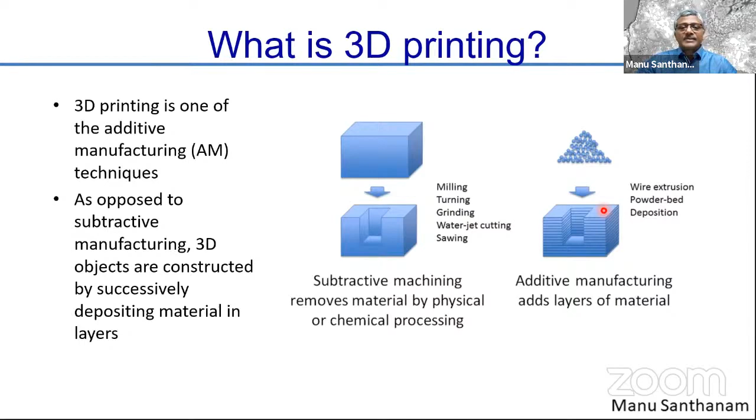Now, as far as construction is concerned, there are two major options for 3D printing. One is extrusion-based 3D printing, which is going to be the bulk of what I'm talking about here. Extrusion-based just implies that you're pushing something through a nozzle, and this is getting deposited layer by layer. So that's basically extrusion-based 3D printing.

The other option is obviously to have a robot which is sitting in one of the corners or perhaps in the center of the building and simply depositing material all around it. That's, as you can imagine, a lot more expensive as compared to this frame-based system, which is easier to construct and possibly easier to scale up in terms of an industrial scale application.

The other 3D printing operation that is conceivable in construction is binder jetting. Here, you're essentially creating the object by depositing the ink on a bed of the material that needs to be printed. For example, on a mixture of cement and sand together, you just deposit water in the shape that you want the layer to take. And essentially you keep on depositing more and more material like this.

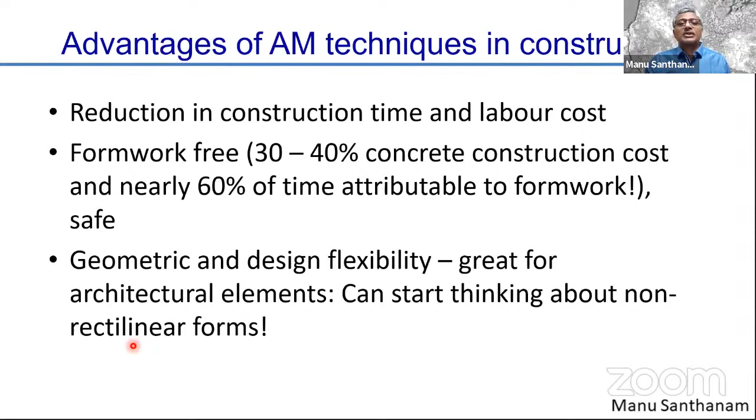Now, of course, there are limitations as to what we can do with concrete, but nevertheless, you can realize something which we cannot do with conventional techniques. So again, let me put this in context at the beginning itself. If we are planning to create more and more boxes like we are used to doing with conventional construction, then 3D printing is not the right option. If we really want to use the benefits of 3D printing, we need to create these forms which cannot be conceived by normal construction.

There are several companies around the world which have executed projects in 3D printing. You have companies based in Netherlands, Italy, Slovenia, USA, and one of the most popular companies is this Witteveen & Bros in Netherlands, and they have created some very amazing structures in Netherlands. And of course, as I said in the beginning, we have our own company, Tvasta, which is from IITM alumni, and they have really done us proud by actually being the first Indian manufacturer of 3D printers for concrete.

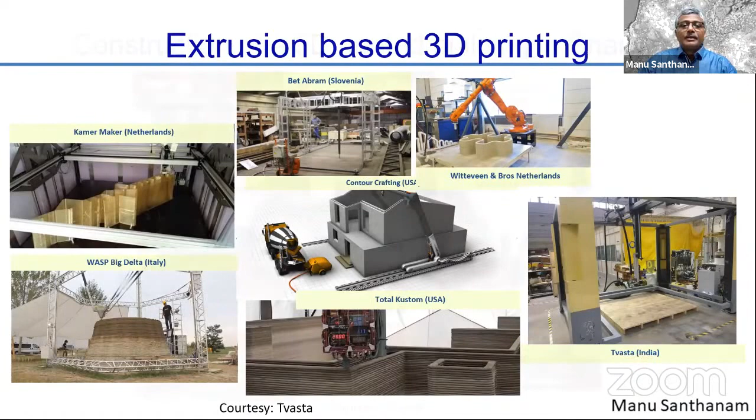So this is just a concept that I'm trying to explain here, what you can do with 3D printing. So this is a factory-like setting in which these construction elements are being created. You can see these structural elements being printed by a similar type of gantry type printer. So it is depositing the material layer by layer. Once this element has been fully deposited, you store it or stack it in the factory.

Most of you must be aware that for concrete, in order to gain strength and in order to ensure that the cement properly reacts with the water, we need to cure it for a substantial period of time. Curing simply means keeping the concrete in a moist environment. And that is what you need to do in the factory to ensure that the element gains sufficient strength. Once it's gained strength, you can then bring it to site and assemble it. So this is possibly the way in which we can speed up construction projects significantly.

Now, one question that must pop in your mind at this stage is, why is it different from precast? In precast also, we do the same thing. We make the construction elements at the factory, and then we assemble that at site. The difference here is that you don't need formwork. In a precast factory, you need a substantial amount of formwork, and a lot of the productivity of the precast factory depends on how fast you can actually reuse the formwork. When can you go to the next stage and so on and so forth.

Here, you don't really have that problem. You can continuously print as many as you want, as much as your factory space will allow, and then ensure that you can actually transport all these elements quite quickly to the job site and get them assembled there.

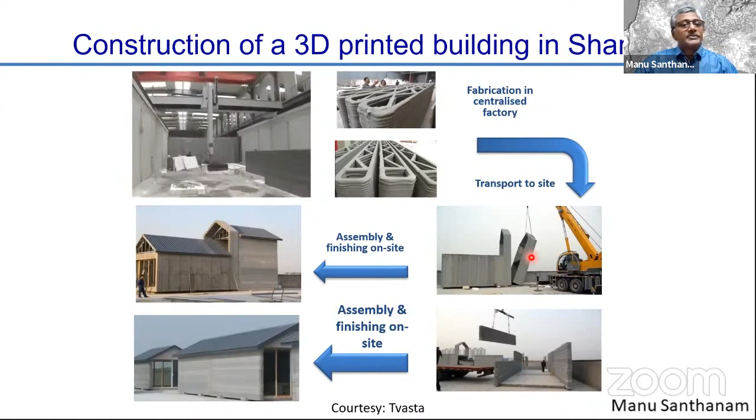Now, several projects have actually been executed, mostly in terms of pilot projects or demonstration structures across the world as far as 3D printing is concerned. So this is a very interesting example of a 3D printed house in Moscow done by Apis Cor. And you can see here the machine, which is basically a robotic arm, which is depositing concrete all around it

and creating this nice circular type of shape, which is not conceivable by typical construction, because then you have to spend a lot of money on shaping the formwork correctly and so on. And such formwork which you create for such special shapes may not be usable again, right? So that's again a waste of money and time in creating this kind of formwork.

These are projects executed by Winsun Global in China, and China is a place where the industry has really pumped in a lot of money and are taking the lead in actually defining the kind of projects that 3D printing should be actually used for.

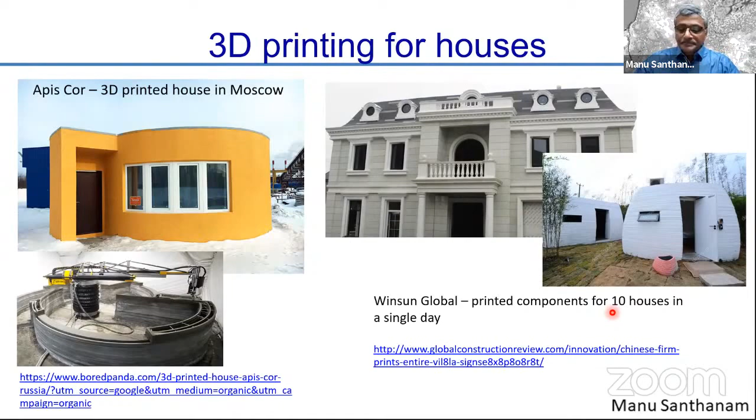So here what they've done is these smaller houses, they printed components for 10 houses in a single day. So that shows the extent of speeding up or scaling up that you can actually do, because you have now the potential for creating more and more of these units. And all you need to do is ensure that there's sufficient amount of transportation available to carry them to the site and place them.

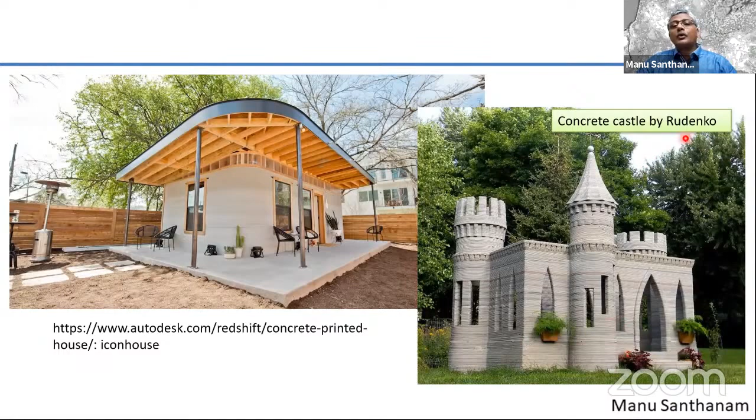This is a project executed by the company called Icon. That's a very nice example of how aesthetically pleasing your structure can be. And of course, on the right, you have a structure that is possibly not important, but it just was made to show the potential for 3D printing for creating unique architectural shapes. So there was a mini castle created by Rudenko, who's one of the pioneers as far as 3D printing is concerned.

But of course, this is mostly on a pilot scale. Commercial scale projects, as was earlier pointed out by Jayapriya, have been executed in Netherlands and the US. Most of the others are primarily your demonstration or pilot scale projects.

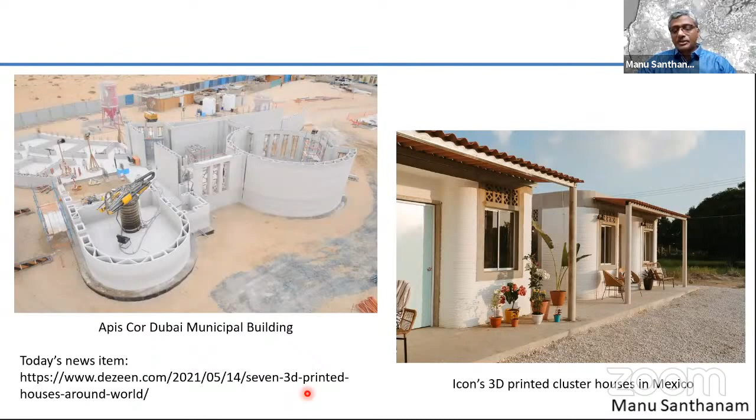One of the uses of 3D printing to create army barracks by the US Army Corps of Engineers was executed for the purpose of actually creating these structures in difficult terrains where you could not get regular construction equipment and manpower to do the construction. And so they were executing this from the perspective of looking at it as army construction.

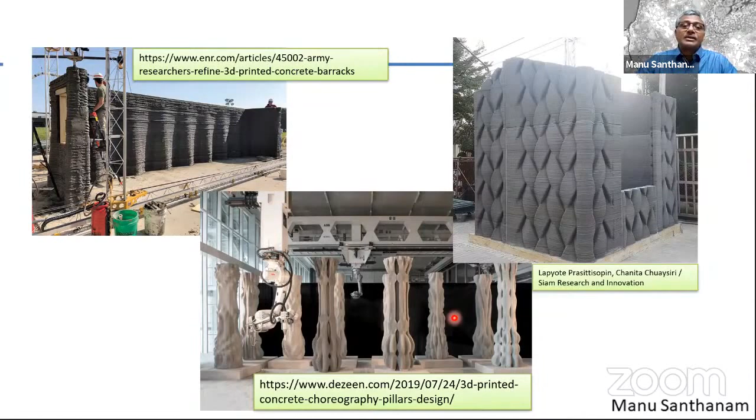And again, you can see the intricacy that can be created with 3D printed designs. This is actually a small security shed that is created by Siam Research and Innovation in Thailand. These are very intricately crafted columns that you can see. These are basically research that is going on at, sorry, not EPFL, ETH in Switzerland, which is a university doing extensive work on architectural aspects of 3D printing.

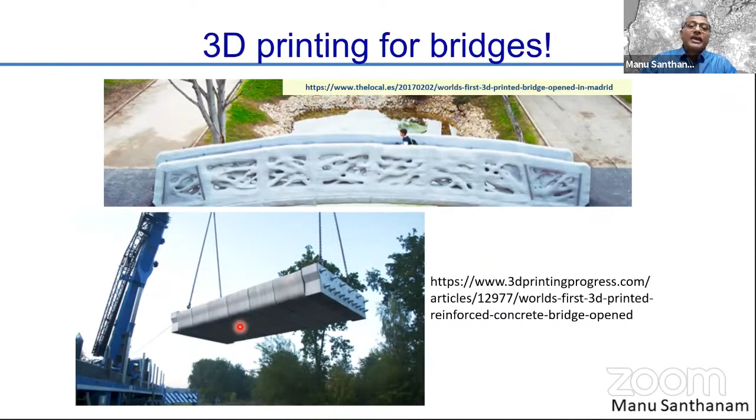Again, 3D printing has also been demonstrated to be used for bridges. This is a pedestrian bridge built in Madrid. And this is actually a post-tensioned segmental bridge that was executed in Netherlands. So there are opportunities for using 3D printing for several different types of elements. However, our focus here is to look at housing.

And this is something that most of you probably are aware of, that our urban population in India is going to be close to 1 billion in 2050. And going by the current estimates, we seem to be heading towards a need of 100 million houses by 2030. We don't have that much time, only 9 years. You might have heard of the schemes that have been specifically created to ensure that we serve the needs of so many different sections of the population by building more and more houses, which is the Pradhan Mantri Awas Yojana.

And then this has given rise to a new event that was launched in 2019 called the Global Housing Technology Challenge, or GHTC, which brought together many different potential technologies that could actually help in rapid construction of mass housing in India. Now, it turns out that for the future, one has to start looking towards technologies that will increase the productivity and not really suffer from the same problems that conventional construction does. And this probably gives some sort of a leeway for 3D printing to be a possible solution for India's housing needs.

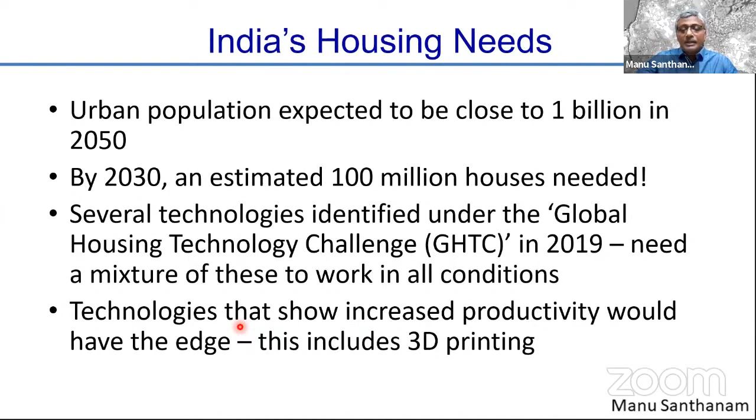However, you have to realize that once you go with 3D printing, there are further needs for scaling up, and really to take it up to the level that is needed for mass housing will take quite a bit of research and development. So why 3D printing of houses? As I said, individual customization can be done.

So when you build mass housing, very often we feel that people have created these boxes, right? You have the same box replicated hundreds of times. With 3D printing, you don't have to worry about that, because each of these units can now be customized to the needs of the client. Even though it is affordable housing, they can still customize it because the printing can be done in different shapes. You don't need to recreate the same shape each and every time.

You can create structurally efficient forms, because what we are creating here are walls which are mostly empty, which have ribs inside to give some lateral strengthening, but mostly these walls are empty and have spaces for basically acting as cavities. And we minimize the material usage by making the forms more structurally efficient, essentially ensuring that we can carry the same level of load without really having to use the extensive amount of material that we typically do on most construction projects.

Again, because of the presence of these cavities, we can now create channels for making weatherproofing possible within the structure itself, and also providing utilities within the walls of the structure. So the overall construction process becomes a lot more efficient.

And again, because this kind of a printer is quite portable and it can be taken to different locations, if you are able to adapt this to the materials that are available locally, then it can be a technology that can actually deliver quality houses in several different locations without the need for a proper construction infrastructure available in those kinds of locations. And again, difficult terrains, for example, building for the army in difficult to reach locations, could also be something that could be conceived by executing 3D printing.

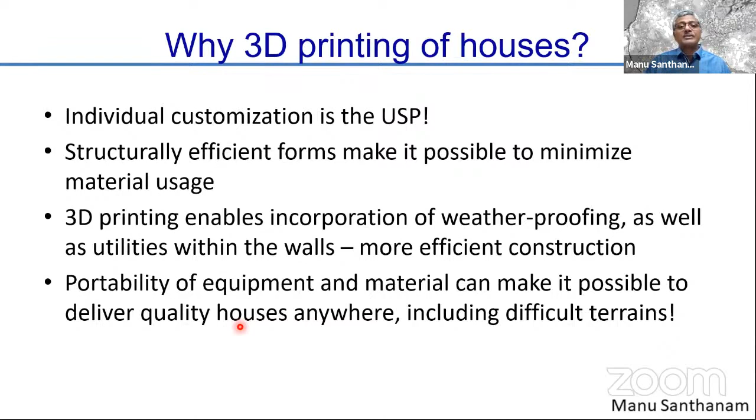Now, the question is, are we ready for deployment tomorrow? Now, the straight answer obviously is no, because we are focusing a lot more on pilot projects to kind of demonstrate the limits to which we can go to really create these structures.

The challenges in really developing this as a technology for satisfying the housing needs of the country include, of course, automation of the reinforcement placement, because many of you may have seen examples of 3D printed structures across the world which really are made with plain concrete. There's not much steel in there. And those of us who are civil engineers know that steel concrete composite action is really designed for a proper structural load bearing capacity, and also the ability of the structure to resist disasters like earthquakes.

So how do we integrate the steel reinforcement in a structure that is made out of this plain concrete? Can we make a robotic or automatic system that places this reinforcement? That's something which we should look at in more detail.

Finishing process, of course. Many of you have seen examples where these layers are actually visible from the outside. You'll see that in our house, we don't have that. We have nicely plastered the walls to make it look like an ordinary or normal house, so that people don't really have the idea that they're looking at something completely different. However, to realize the benefits of using this kind of material, one has to be able to use the structure as is without the need for plastering. And there we need to look at finishing processes.

Printing horizontal elements like roofs, foundations, and other slabs, for instance, could be a challenge, because you're basically wasting your time by depositing material horizontally. So can we look at creation of formwork on the edges and dumping normal concrete inside? That can speed up the construction process significantly. So 3D printing is really viable mostly for the vertical components like columns and walls, whereas for the horizontal components, you can still make do with normal concrete.

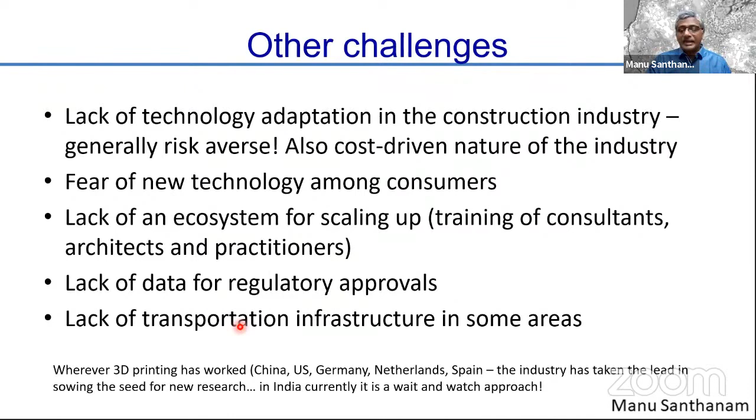So now let me change gears a little bit and show you our journey in pictures, which will culminate in our house, and my friend Aditya here will share a lot more about how this house was actually conceived and built. So we started off with very small scale printing. You can see this is a very small tabletop type printer which we were using, which had a simple screw based pump that was simply pushing the material through, down the nozzle.

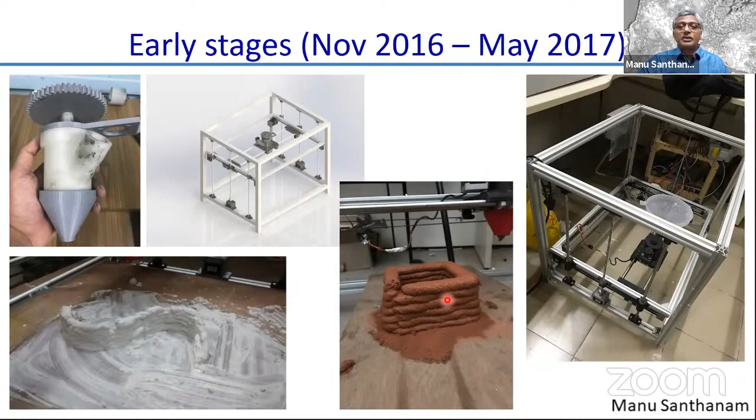And we tried very interesting prints here with lime. This is basically lime, and this is clay without any cement in it. So 3D printing can make printing with other materials also possible, not just concrete. And you can see examples of very large scale projects also having been executed in clay. Earthen materials also have been used for executing large scale projects.

This is really the start of our research, where we started looking at how we can fine tune the concrete mixture design to meet the demands of 3D printing. So we had to really go deeper into understanding the aspects of rheology of the concrete mixture that we need to understand and replicate each time that we prepare the mixture, so that each time it is extruding from the printer in exactly the same way.

So you can see here, we created blends of materials that were printed in these example structures, 3-layered and 4-layered walls. And you can see very clearly that all of them are keeping their shape properly. That means they are highly buildable. And the second is, as the new layer comes on top, the previous layer is still able to retain its shape.

Now you need to realize that when you're printing concrete, you can't wait for each layer to get hardened before you place the next layer. What will happen as a consequence of that is that you'll create an interface between the two layers, which will be very weak.

So we don't want to do that. We don't want to wait while printing. So as the first layer is printed and the printer nozzle comes back on top, the first layer below should still be fresh. That means it should not have hardened at all. Okay, but it should have gained some internal stress bearing capacity, which will allow it to take the load of the layer that is coming above without deforming.

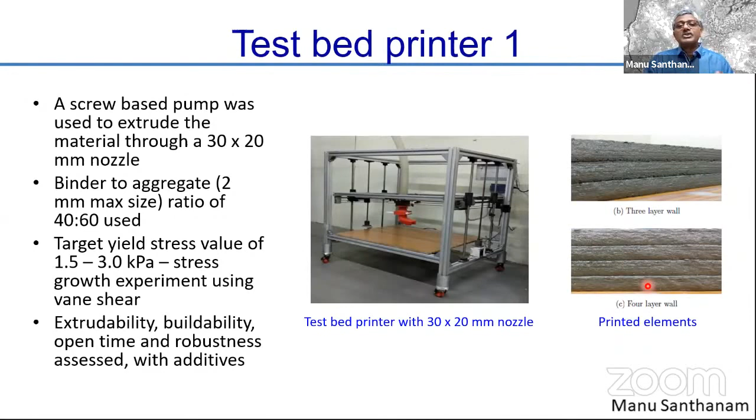So that's basically the rheological control of the mixture, which we try to execute with some well-known parameters and well-known material combinations, which led us to really the right kind of design strategies. So we use this to try and print all these weird looking structures. Of course, most of these are square and circular elements, but these were our first trials that were executed somewhere in the summer of 2017. And we went on with these concrete trials all the way up to 2018, right?

We had to really create ways of testing these materials, because this is not like conventional concrete. When conventional concrete is used in construction, we make these standard specimens, cylinders and cubes, and then get those tested in the laboratory. All that has been well documented, well understood, and standardized for people to accept the results. But here we are working with a material that is layered. So how do we design tests for these?

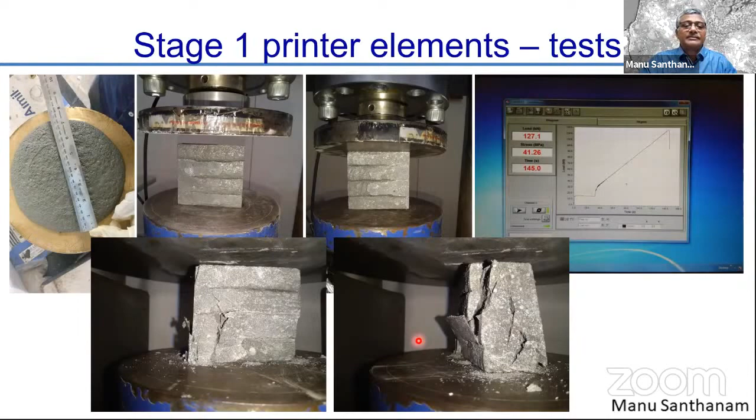Again, that's something which has not been universally accepted yet, but we were in the process of creating strategies by which you can actually test the strength of these layered structures. So these are some experiments that are describing the tests. And of course, a lot more has been published in research papers where we were looking at the characteristics of the concrete that was printed and the dependence of the concrete strength on the interface, right?

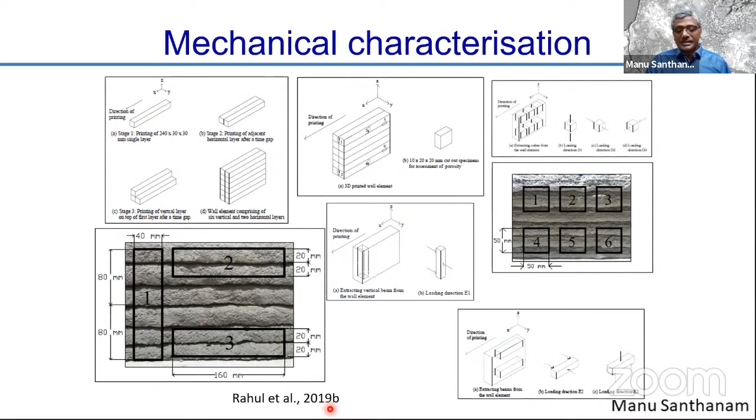Because you can imagine that even though you're printing fresh, that means you're putting layer upon layer while it is still fresh, because it is not jointed together by something like a compaction or a vibration, there's obviously going to be some level of interfacial effects that will play up in your overall strength attainment. So we were trying to understand in compression, in flexure, how does this material behave, and how to really undertake a characterization itself. Again, this is also showing you some additional tests that were being done.

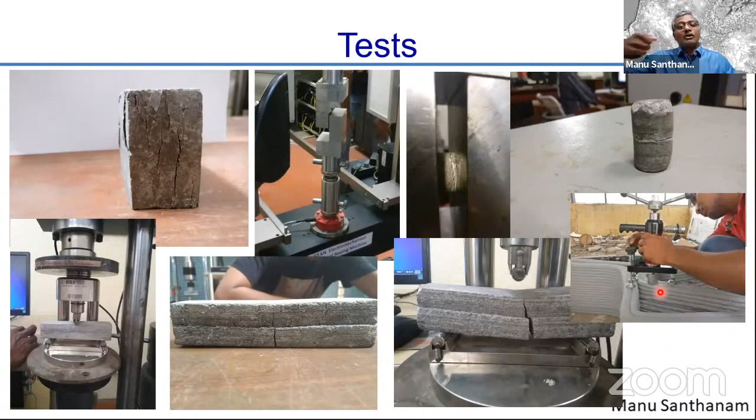We also tried to look at whether, after the structure has been cast, we can pull off one layer from the other by doing a pull-off test and so on. We also experimented with different kinds of shapes and combinations of materials, so that we were able to understand what are the limits of our printing strategies.

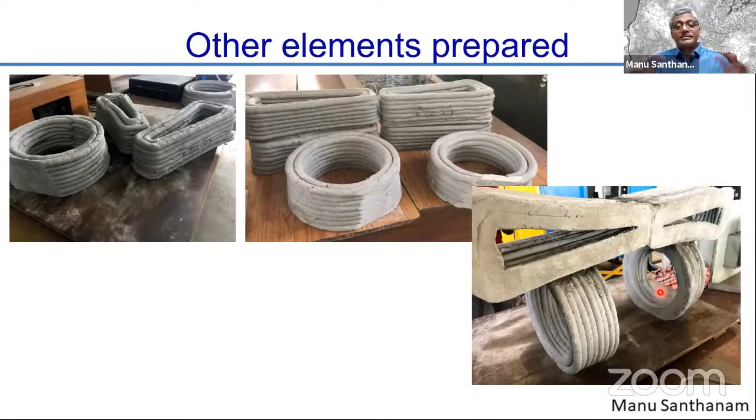We then moved on to a slightly larger scale printer, which had a different sort of a printing mechanism. Earlier, I said in the small printer, we had a screw that was simply pushing the material continuously from one end to the other, so that we had a continuous flow possible. Now, in this case, we used a pump-based system to push the material to the nozzle. So you can see this pump is here. This is a primer which pushes the material into the pump.

Now the issue with this is once you create an air gap in the pipe, the pumping will not be possible. You need to actually dismantle everything and clean up, and then only you can start the next layer. So with a single pump, we could only get about 60 kgs of print at a single time. You can see a module here which is 3D printed, and that was done with a single push of the piston. Right. Another problem that the material experiences while it's going through this pumping. No, first of all, why did we move towards this pump system? The idea was to ensure that we are able to push concrete that is a lot stiffer.

Because when you push wet concrete, this layer-by-layer deposition becomes very difficult because your material starts squishing or deforming. If your material is already stiff, when it's pushed out, it will retain its shape much better. So that's why we moved to this pump-based system, which was able to push out stiffer mixes.

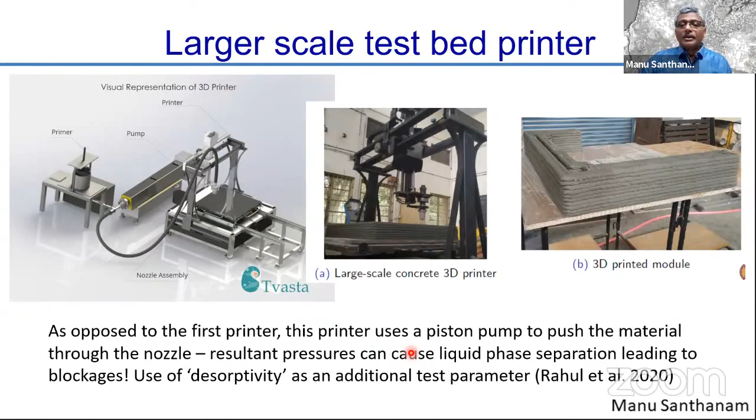But in doing so, when you're applying pressure to push this material through the pump, there's also a possibility of the water simply separating out of the rest of the solids. So we had to design additional tests to ensure that the materials that we work with were able to resist that level of pressure.

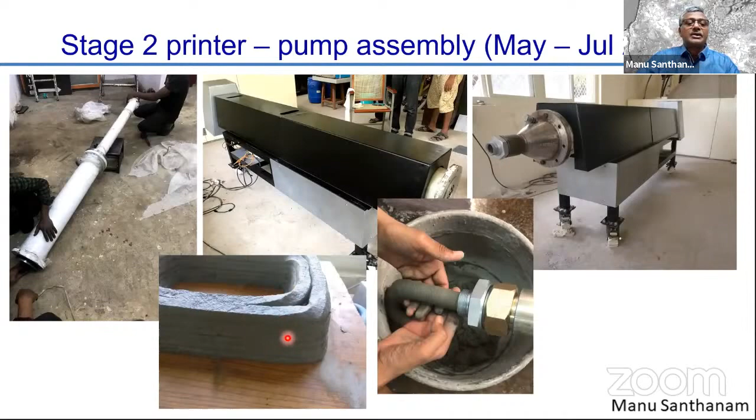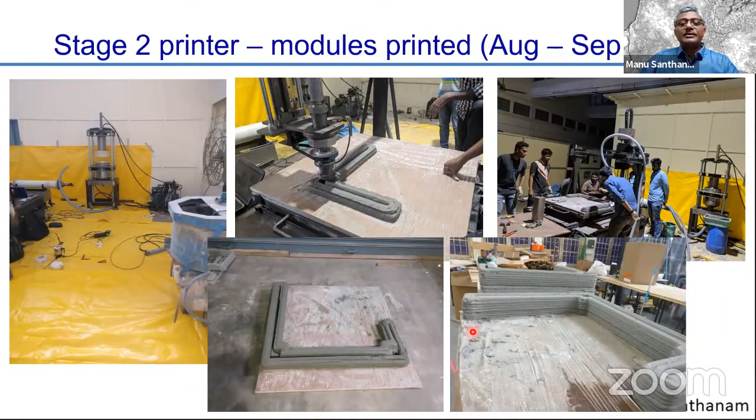Now, just to show you a bit more detail about this pump, you can see this pump extruding the concrete out. And these are some trials with square-shaped elements that we actually worked on in terms of the pump. So again, this is showing you the printing of these modular elements, which were about 60 kilograms. And these 60 kilogram elements were printed and then assembled together. Here you can see the assembly of these modules.

Okay, this is one module, one half. This is the other half. Each half is about 60 kilograms. And these modules were then assembled, stacked just like a regular masonry structure to build up this simple room that we have just outside our civil engineering department. And we created this modular structure in September 2018. That was again technically the first 3D printed structure in the country.

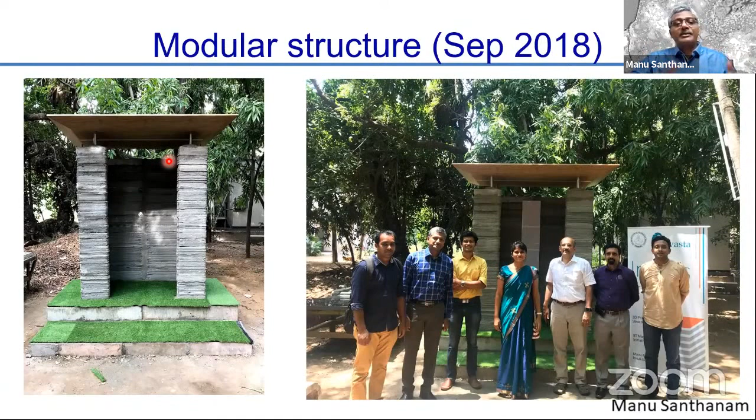So in 1 year of work, we were able to build up to this level, to build up a modular structure. But obviously, this does not really hold much water because, again, having modules of 30 centimeters is good for such a small structure. But if you're going to build a larger structure, the idea would be to continue the printing until you reach the entire height. So we had to obviously move towards a larger structure.

Of course, when we printed this, we popularized it with the Ministry of Housing and Urban Affairs. We had the Secretary of the Housing Ministry also come and talk to us in this workshop that we actually did. We also did a demonstration with them. They were quite happy with the progress we had made and promised to help us. Hopefully, this promise will be realized very soon.

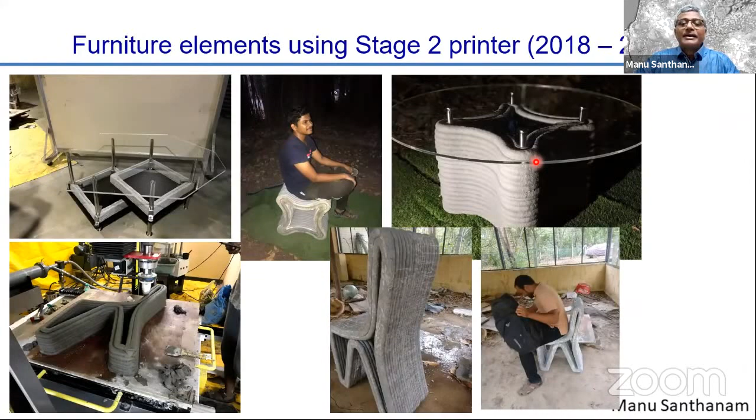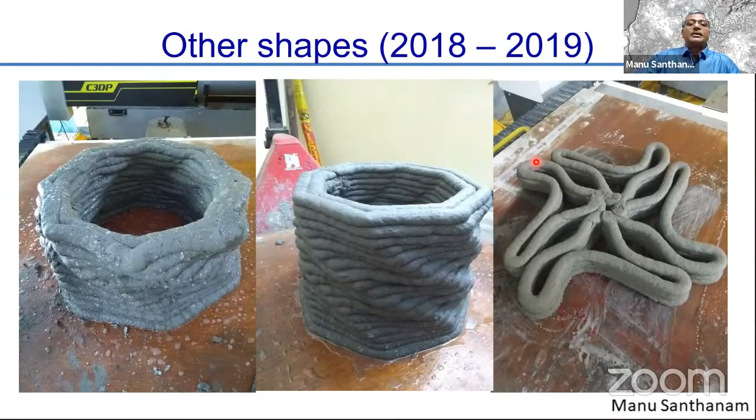We also, of course, experimented with various structural shapes or non-structural forms, also for furniture elements. You can see we've created these chairs and tables and other furniture elements, which look quite fancy and can provide a new dimension to what you can actually do with 3D printing. Again, architectural shapes with overhangs, something that can be made possible without much human intervention, could also be prepared with 3D printing.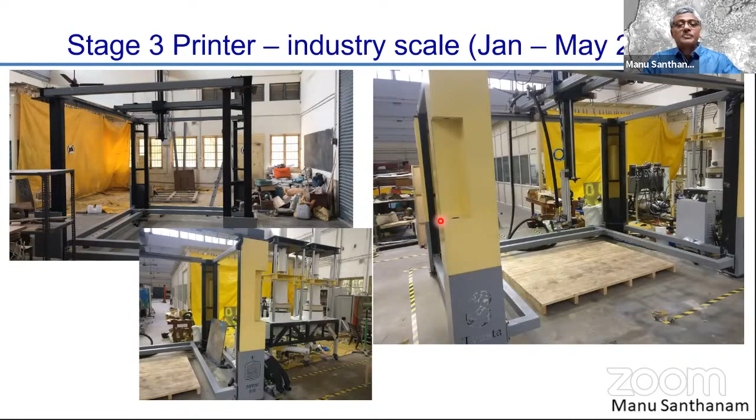Now, we wanted to move to an industrial scale printer so that we could print much larger components. So this was the third printer assembled by Tvasta. And you can see this printer has, again, the same gantry-based system, but here the upward movement of the Z-axis could print as much as 1.5 meters height. This was partially sponsored by L&T, and we were able to actually build a toilet module. I'll come to that in just a minute.

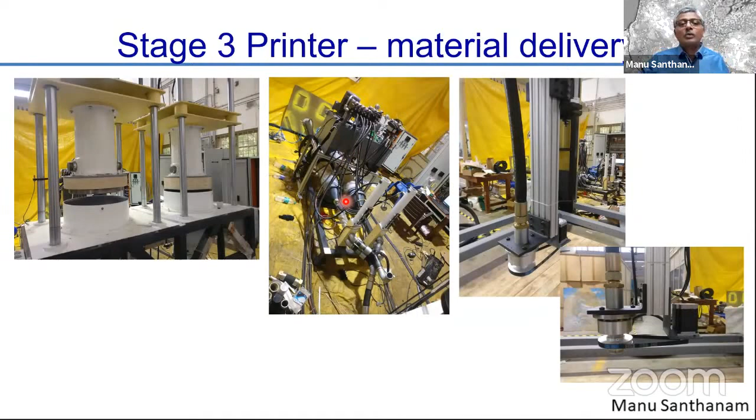I just wanted to show you the material delivery system. So these are two hoppers here. The idea was that these were connected to these two pumps, which are shown here. While one pump is executing a backward stroke of the piston, taking in material, the other is doing a forward stroke and depositing the material into the pipeline. So while that completes its material delivery, the second pump is almost ready to continue without any breakage in the material supply. So with this, we are able to deposit a lot more material in a continuous tandem operation of the pump.

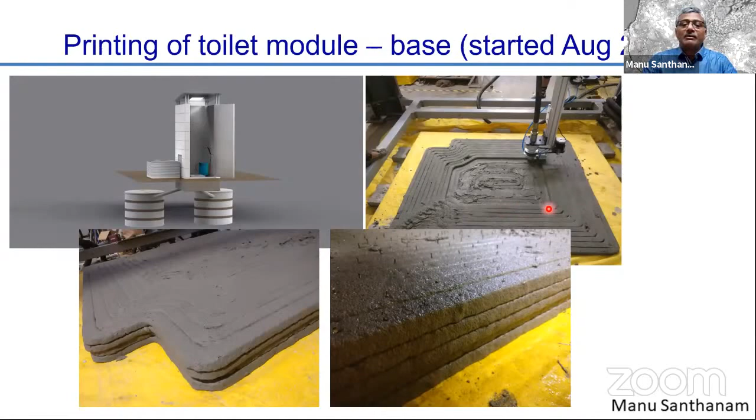So here you can see we conceived this toilet module that was to be printed entirely with 3D printing. In fact, even the slab and the roof were also printed with 3D concrete. You can see here the slab, the bottom slab. This is the lower half of the toilet module, which is about 1.4 meters in height. And this is getting completely assembled using the printing.

And this is the completed lower half. Of course, you see some white patches on the top. We were experimenting with a chemical that could be sprayed on the surface to speed up the structural buildup of the concrete.

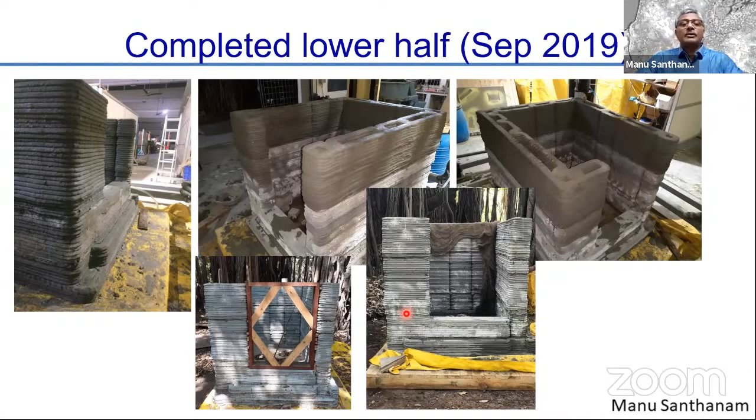This is the upper half. As I said, we also printed the roof element. Actually, there's really no point in printing these horizontal elements, because it's much more elegant to make use of something which is readily available. A precast element would do as well as anything else. But again, the mandate from L&T was to actually print the entire structure without leaving any component.

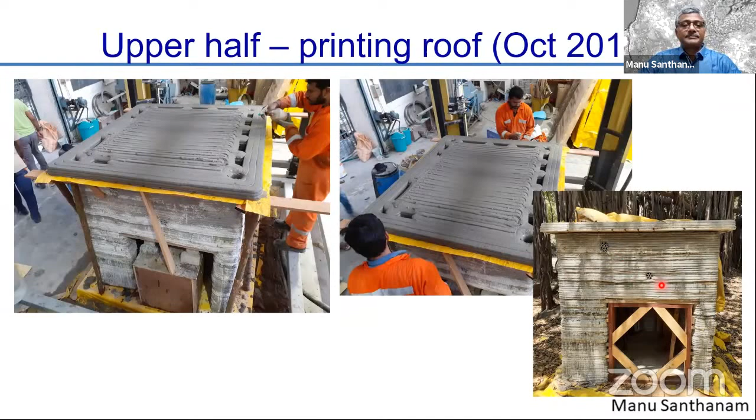So we also left some gaps here, as you can see, for the pipes to be integrated with the utilities for the toilet. So just to show you some pictures of the construction of the house, I have given you all the fodder which led to the development of this construction of the house. Aditya will, of course, show you much more details of the house itself, but I'll show you what we did to actually enable the house construction.

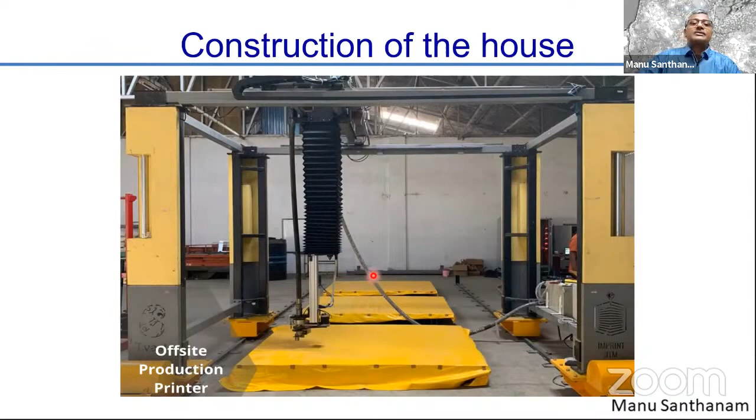First of all, the printer itself was moved to a location where Tvasta had the ability to actually move it along one axis. So you can see here there are rails, and this entire system can be moved along the rails to actually print on 3 beds simultaneously. So there are 3 printing beds, which allows simultaneous printing of multiple elements together. So that's what they did. They printed all these multiple elements together.

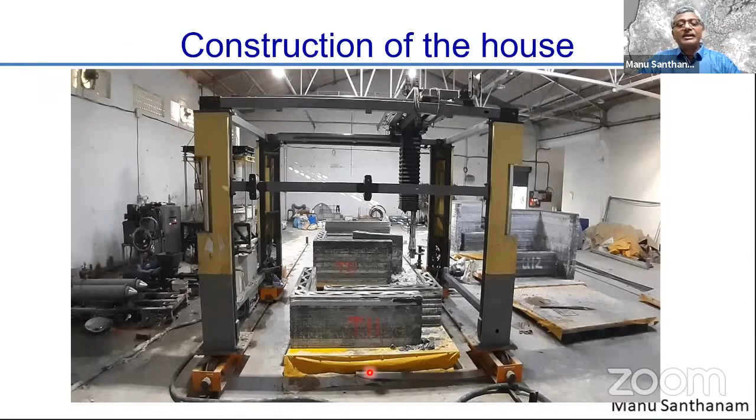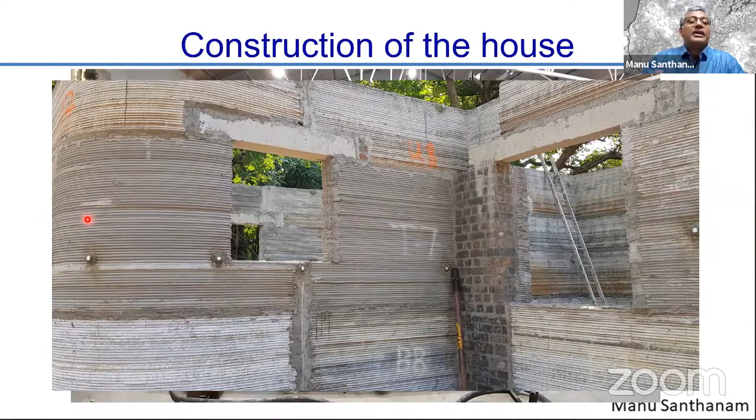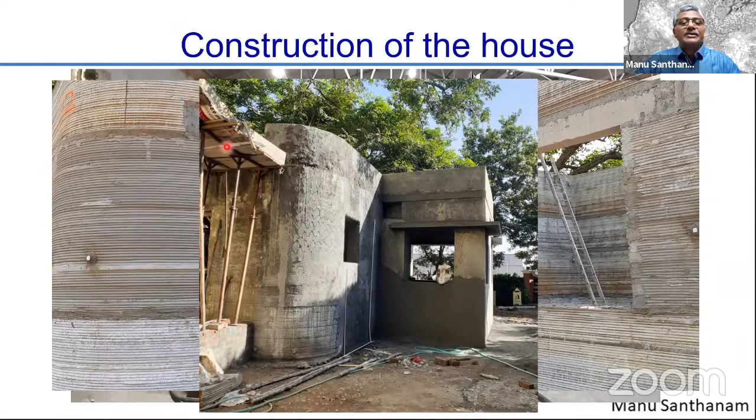Okay, so you can see here these are the assembled components, and we then did plastering just to ensure that we finally have a look that resembles a conventional house in all senses, but also integrated with these nice circular components. The roof was made in situ. The foundation also was done in situ, as you may have seen in the video that was shared in the invitation link. We also had the porch outside the main veranda, and that is also a curved element, but that is not 3D printed. That was again done in situ.

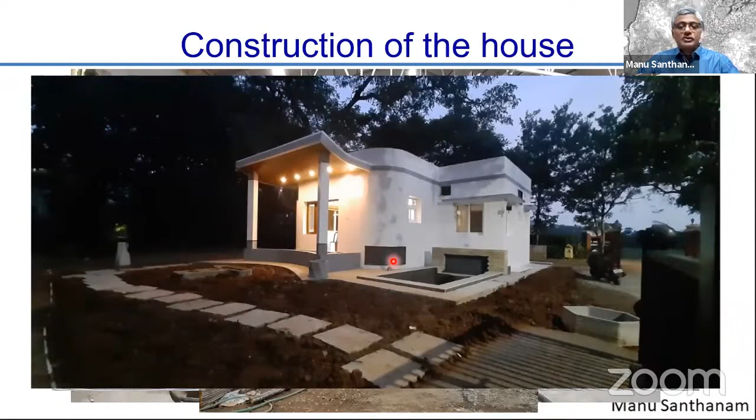So this is the completed house. Of course, you'll see much more interesting pictures from Aditya, and there are several locations where the plastering has not been done to give the user a glimpse of the actual wall structure. And this is a really impressive structure that's come out. Anybody who's visited the structure physically has said that this is probably the most glamorous house that they can see inside the IIT campus. I know that we have a long way to go to make them glamorous, but this probably gives us an opportunity to create something that is unique and interesting. But of course, I'm not going to give too much more in terms of pictures, which Aditya will share later.

Just to summarize our journey, in 4 years, we have actually caught up with 50% of 3D printing groups around the world. The work so far, again, has been executed at a budget which is far lower than anything which has been done elsewhere. We have worked on a shoestring budget. Aditya will tell you more stories about that. But of course, if we really have to go big, we need to scale up from here. We need to make sure that our efforts are in line with the efforts that are made elsewhere in the world. How do we take this forward?

The idea would be to come up with a 3D construction toolbox, because one should have some sort of a digital platform where a user is able to simply interact with the platform and choose from a variety of designs and methods to conceive their own individual structure. So the client should be able to define the layout and the architectural sensibilities by which we actually do the construction.

And the platform, the digital platform or the toolbox, should be able to then break down into standardized modules. Why standardized? Because these standardized modules will be capable of getting joined quite easily. And if there's any need for putting reinforcement, that can be integrated quite easily into these modules.

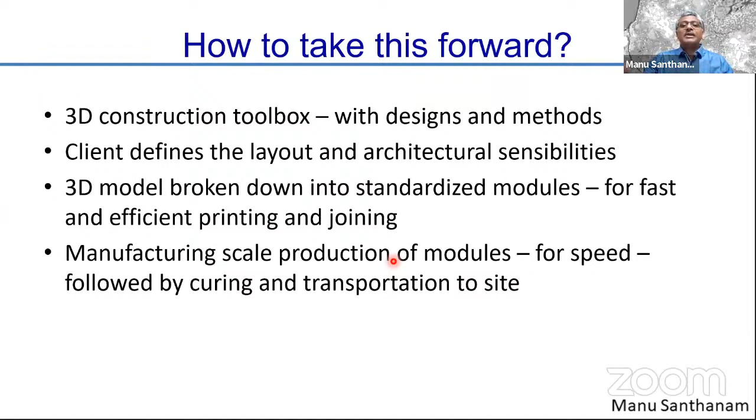And again, manufacturing scale production can then be realized for the modules for speed, followed by curing and transportation to the site. So that will be the ideal way to actually take this forward, operate it in the precast type of a way, so that we can deliver printed components for assembly on the site quite rapidly. And that's the kind of thing that needs to be done.

So in the future, with sustained R&D and support from the industry, and of course, alumni who are watching this video, we hope that it will be possible to realize these speeds that I have listed here: toilet modules for, let's say, Swachh Bharat Abhiyan within 6 to 10 hours, a single-story house within 5 days, including the site preparation, the foundations, and everything. Multi-story buildings, at least up to G+3, can be realized with the existing technology in less than a month.

And again, off-the-grid construction in remote locations, assuming the logistics are sorted out and so on. Again, in 2 years, I think we will be ready for mass application, provided we have the right financial backing and research support, which needs to be developed over the next couple of years.

Right. So just to conclude, as I said, India's first 3D printed house was a culmination of 3 years, actually 4 years of research efforts. As I remarked at the beginning, it is totally Indian. The technology is totally Indian from start to finish. And I really have to give the credit to Aditya and his young team. The path ahead obviously is a tough one because we really need to scale up and standardize the production process to ensure that we can deliver on a scale that is demanded by our country.

And just to give you some other highlights, several human resources were trained in this project. One of my PhD students completed his PhD and one PhD is ongoing. There's a dual degree student who joined Tvasta. This dual degree student, incidentally, was the one who stood by all the process of construction of the house. And I was remarking to him that no student of ours actually takes up a house construction as a project. So that was his dual degree project, to oversee the entire construction of the house.

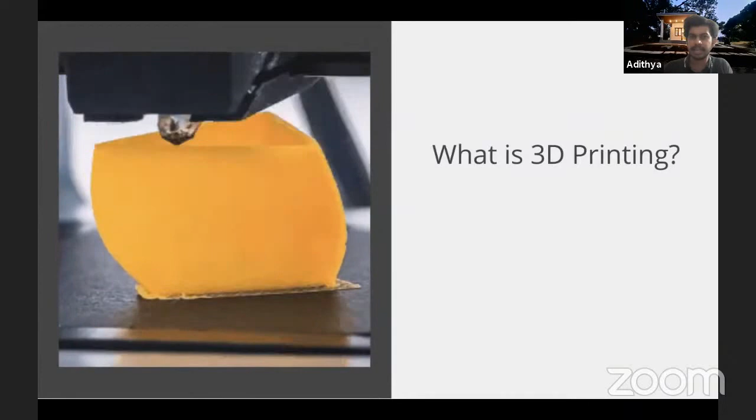Yeah. So as I said, we started this company in about 2016, and our real aim at that point of time was to develop 3D printing technologies, not specifically for construction. And 3D printing essentially is a wide family of technologies, nearly 25 to 27 technologies coming under its umbrella. Everything sort of follows the same principle. That is, you build an object, a structure, or whatever it is, by adding material on top of each other, layer by layer. That's a fundamental principle of 3D printing or additive manufacturing.

And we were working on a slightly different technology. And now, coming to construction 3D printing, we really had to focus on a few key elements, and we had these ingredients. So the 3D printer itself, the machine, that is something that we had expertise to develop. We all came from the mechanical engineering background. A couple of my other co-founders, they're also from IIT Madras, and they're much more of engineers than I am, but they really had the network and the capability to design and manufacture these large machines.

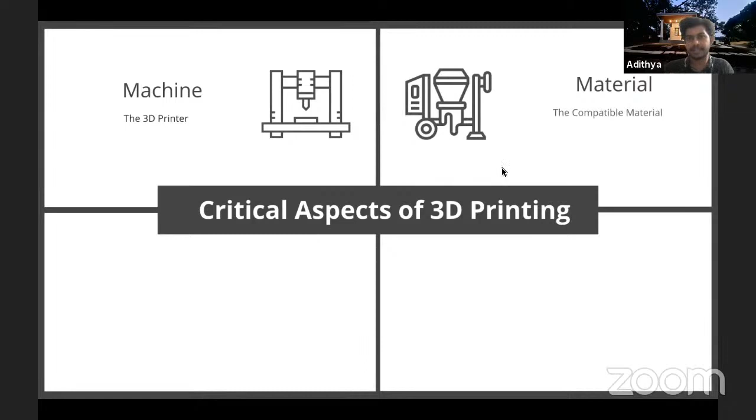On the material side, we require a special type of material to 3D print large scale structures. And for this, we received extensive support from Professor Manu. We had support from a PhD scholar who was working under Professor Manu, named Rahul, who worked with us extensively. So I would say this is a very good example of how a startup and an institution like IIT Madras can work together to build new technologies. It would not have happened without that collaboration, and that's something that we really take away from this entire thing.

And we had to develop a new software for this entire 3D printing process to be handled. So the nature of the software is such that you can put in a BIM file or a building information modeling file, which architects nowadays are really familiar with. You can export a standard STL format from that BIM software. Any BIM software offers that. You can take it into the software.

So I get this question a lot. 3D printing has existed within the construction market for some period of time. Why hasn't it taken off? So I would say one reason is several companies in Europe who started developing this, and even in the US, did not have the ambition to really scale up. They developed very good technologies, but probably they were not ready to push it into the market with the sort of hunger that should be displayed.

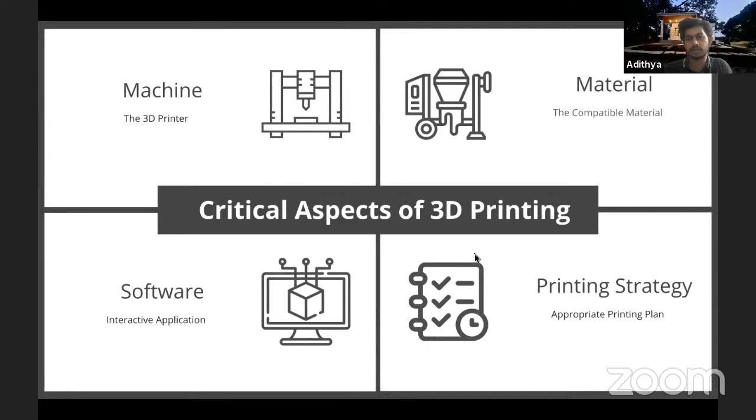So in India, the good thing about the group that we are working with is we have us working from a startup's perspective, how to commercialize this, and we have support from institutions such as IIT Madras, which really have the mindset to go into the depth and the fundamentals of developing this tech. So that's something that has been lacking in some of the other countries. So essentially, the vision of the company is to use 3D printing to automate construction to a very large extent. So we are trying to automate construction up to 80%, going beyond just 3D printing the structural aspect of a building.

So we want to look at automating the plastering process, look at integrating the MEP elements, that is mechanical, electrical, plumbing elements, into the structure during the printing process to an extent possible, and also look at reinforcement integration with the automation that is necessary.

So essentially what we are doing is bringing digital construction or digital technologies to the construction realm, probably for the first time. The construction industry is one industry which has not seen any sort of penetration of automation or digital technologies at all. This cannot be said of any other industry.

Which is really a matter of concern, because if you look at the two largest assets that a normal individual will own in their lifetime, the first will be a house, second would be a car. The automotive industry is developed to such an extent that it has become the backbone of Indian manufacturing or any country's manufacturing, and they've been able to make cars really affordable to the consumer. Whereas the construction industry has really not been able to take that to the final consumer, and hence there is a little bit of a mismatch.

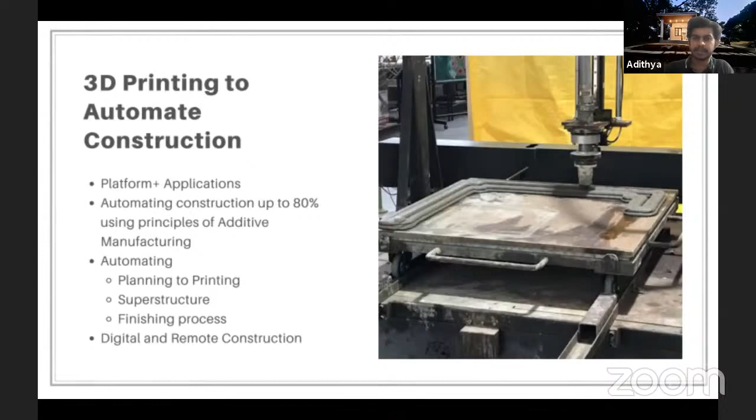And also, technology-led construction processes, be it precast or any other technology, are really suited for large scale construction where builders build extremely large apartment complexes or infrastructure projects. Whereas if an individual is building a house or any structure, a toilet, they do not have any technology to rely on. So this is something that 3D printing can solve because every aspect of this process is digital in nature.

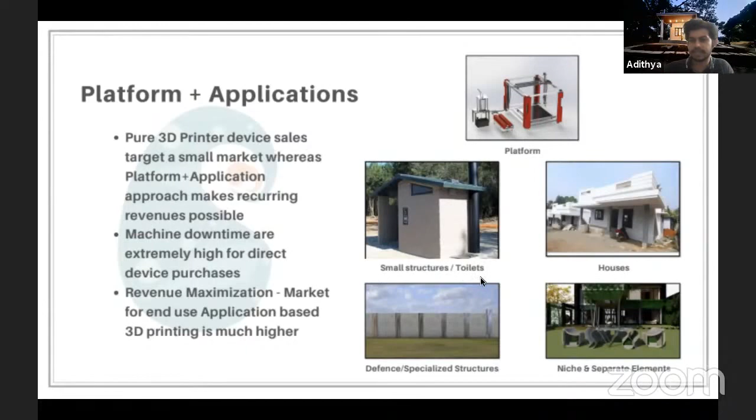So the 3D printing platform that we have built can cater to multiple types of structures. We can build anything from a small toilet module to houses. We're also looking at a few defense projects to work with the Indian Army. And of course, as Professor Manu showed in his presentation, we can build furniture elements, facade elements quite easily as well. So it has wide varied applications.

And three of us, as I mentioned, started this firm, I and a couple of my co-founders. We're all from IIT Madras, 2016. And it's been a real collaborative effort between IIT Madras and us. We started this organization called Imprint within IITM, which is IIT Madras Printability Lab.

And the good thing is it's built in such a way that industries can come and work with us. We have worked with L&T and a couple of other cement manufacturing firms as well. We are looking forward to more industry involvement. And we collaborate with other institutions in India as Imprint to take this technology further.

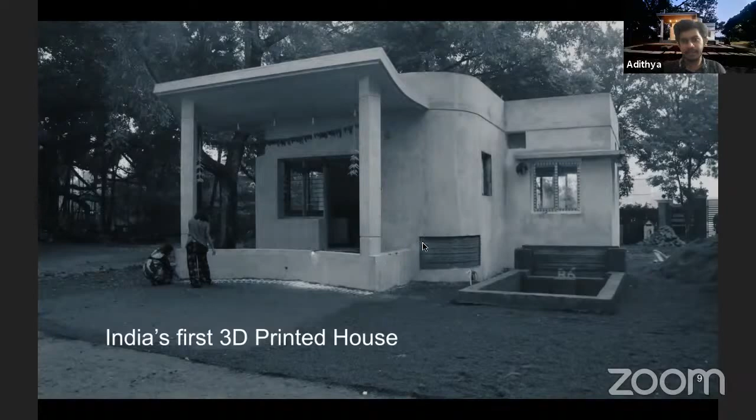So this is the 3D printed house, not completely finished, and this is the structure that we have fully built. One good thing about construction technologies is once you build it, you can really touch and feel it. And what we want to say about this particular structure is it does not feel different at all from a conventionally built structure. That might sound like a very different pitch from anyone else who might be talking about their product.

But what is necessary for an Indian consumer, especially, is that they're able to trust their house, the single most valuable asset that they will own in their lifetime. And Indians really trust quote unquote pakka houses, concrete construction, or brick and mortar construction. So one good thing about concrete 3D printing is we can build it with the material that they're familiar with, which is concrete. And once the structure is built, you really have to go in really deep to figure out that it's a 3D printed structure. It does not look, feel, or sound any different.

So we have had consumers come in, they knock at the walls and see whether it's concrete. They want to know about the construction aspects, although they might not understand it, because it's really important to them. So that's one of the key aspects of the structure that we have built.

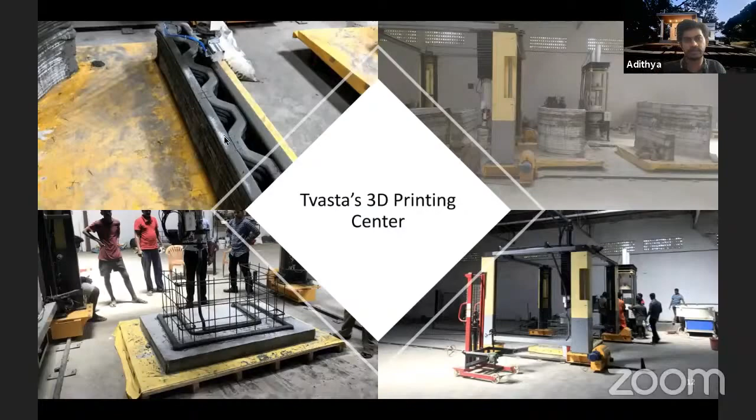So these are a few pictures. I'll just take you through a video where I can explain to you how this entire process happens. Professor Manu, I think, explained quite a bit with respect to how the technical aspect really works. So these are a few images of our factory. This is within Chennai itself. So just to give you a perspective from a video that we shot during the construction of the house.

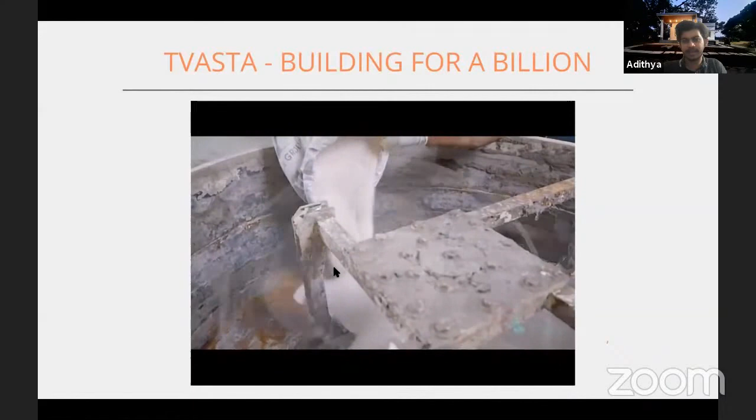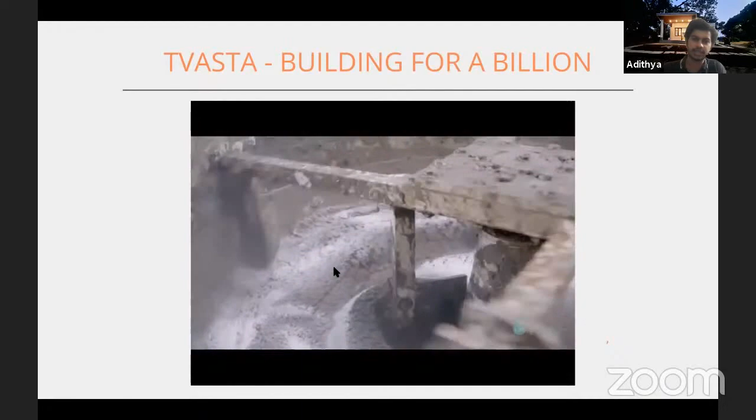So as I said, we have left spaces within the structure to just show that this is a 3D printed structure and not a conventionally prepared structure. It all starts with the proprietary concrete material. It is a special type of concrete, and we require a different concrete mix design compared to conventional construction because we are not using formwork. And this concrete essentially has to bear its own load and take its own shape. I'll just show you that as we go forward.

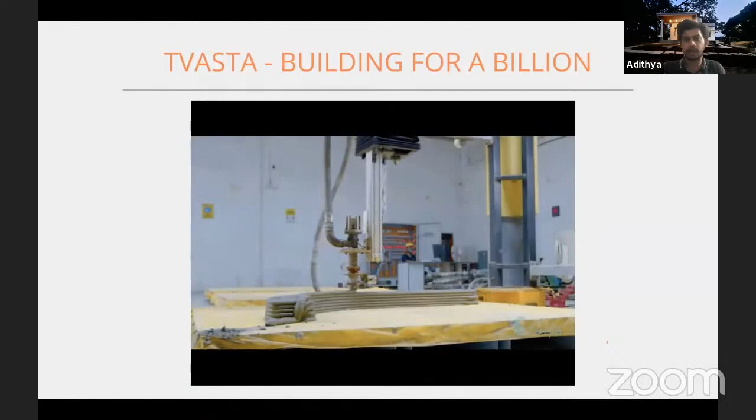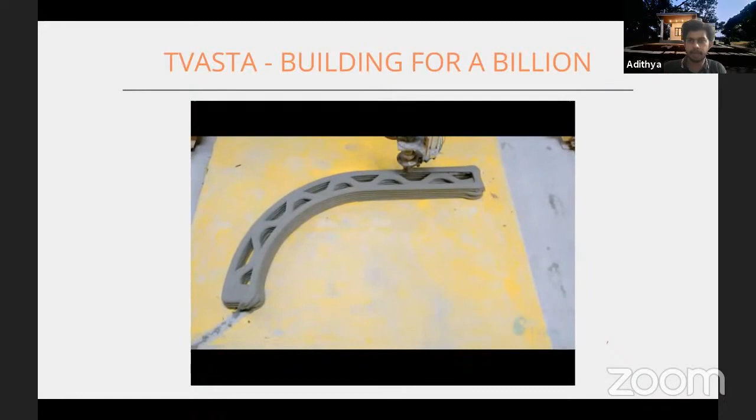But it all starts with the digital model preparation, as I mentioned. So we load this 3D model, and then the printer completely acts on its own. So as you can see, this is a special type of concrete. Once it is deposited, it does not really flow like normal concrete. It takes its own shape and it retains its own shape, because of which we are able to build quite fast. And this is a production kind of setup that we have in Chennai.

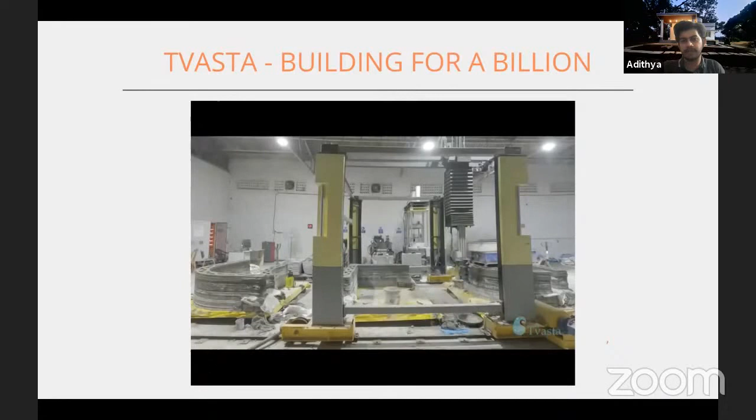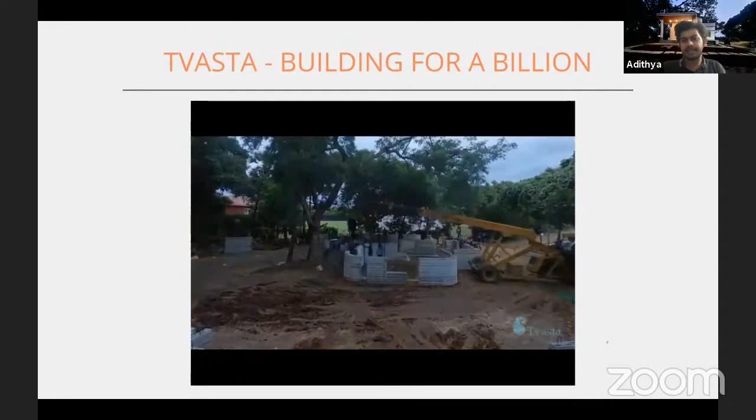So essentially, you print on multiple beds, and like a normal factory environment, we try to minimize downtime as much as possible. So once an element is built to some degree, we move to the next element, print on that, so that there is no deformation at the level. So once the element is 3D printed, we can easily assemble it on site. Assembly takes very minimal time.

And one of the key questions that we get is, have you used steel reinforcement? We have used steel reinforcement. It has been integrated during the printing process. So we pause the printing, integrate steel into it, and then proceed further.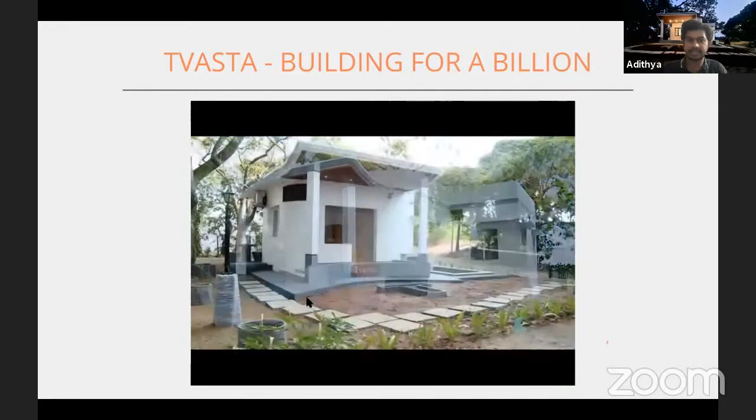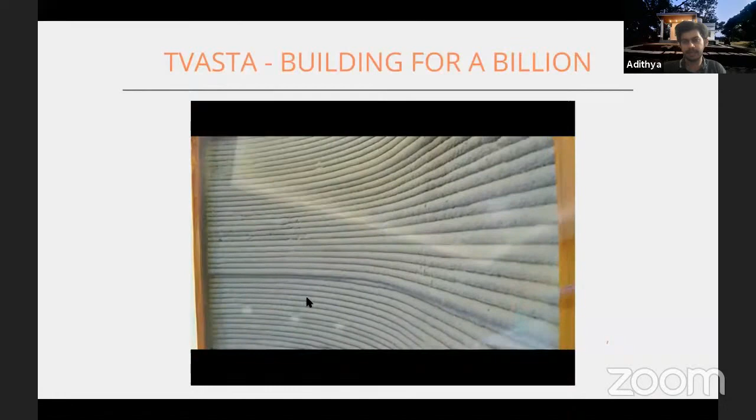So these are a few architectural elements that we printed along with the house. So as you can see, it looks exactly like a conventional structure. There is hardly any difference once we build it. And of course, this time we finished it completely conventionally. That is, the plastering has been done conventionally, painting.

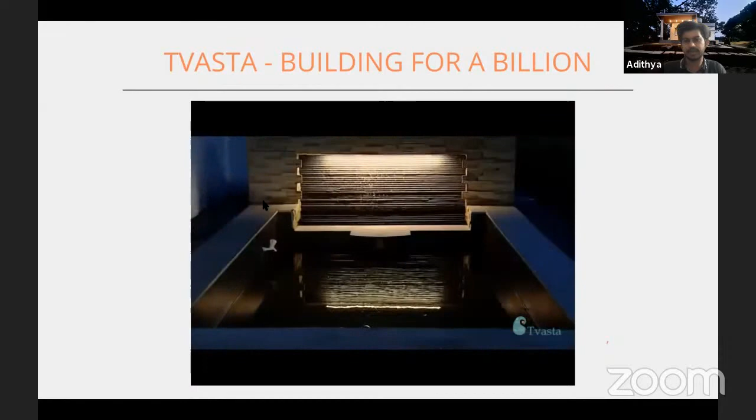Moving forward, we'll try to integrate as many of these processes during the printing process that we have. That is, we are trying to minimize as much site work as possible. So once the structure goes to the final construction site, it should be a very easy process to put it together.

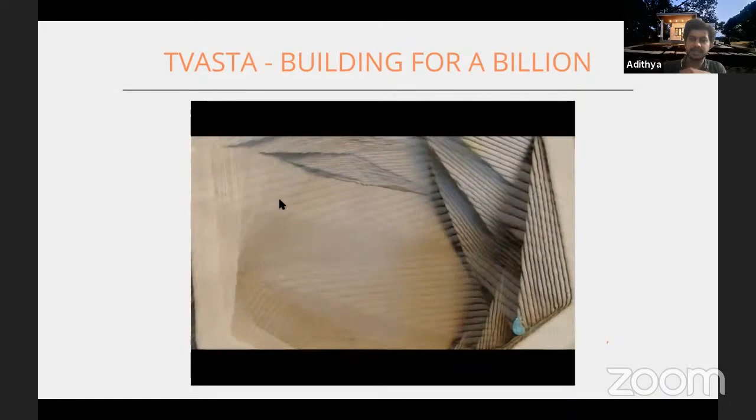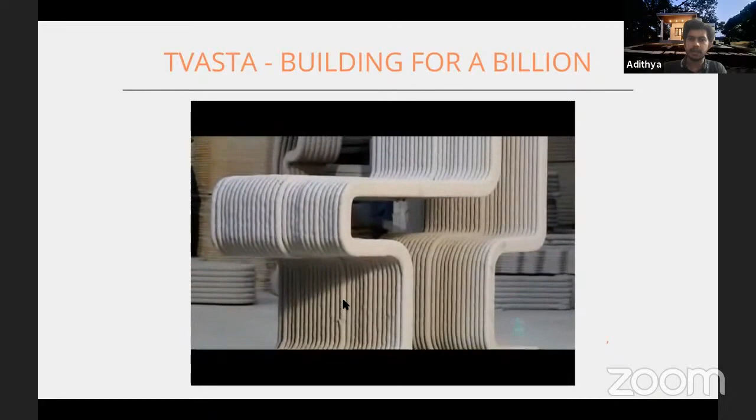And this particular process that we adopted is called offsite 3D printing. That is, we print in a factory environment, and then the elements are taken to the final construction site and then assembled. Our next project is in Pondicherry, and there we'll be attempting on-site 3D printing. That is, the printer itself will go to the construction site and print right at the construction site. So there will not be any assembly that is necessary.

But offsite and onsite are not mutually exclusive processes. That is, you don't have to choose one over the other. There are cases where offsite will be better. There are certain use cases where onsite will be better. Especially in a crowded urban environment like India, we feel that offsite 3D printing will offer much more flexibility. But in certain rural regions, it might be much better to go with onsite, since we can avoid assembly altogether.

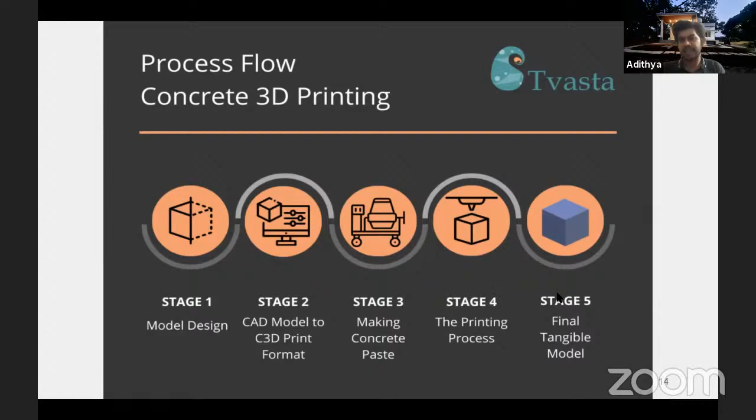So these are the 5 stages in 3D printing that I mentioned earlier. One is the digital model design. Then we come to the slicing element, where our software divides it into multiple layers and gets it ready for 3D printing. Then we have the material which is loaded into the printer. We have the printing process, and then we have the finishing process to get it to the final shape that we want. So this is our 3D printing center, as you can see.

So I just wanted to show you how the digital architect's imagination looked, and how we were able to exactly translate it into the final structure. So that's the magic of 3D printing. Here, we have explored certain curved elements and certain square elements just to show that for a 3D printer, it does not really make a difference whether the element is curved or straight.

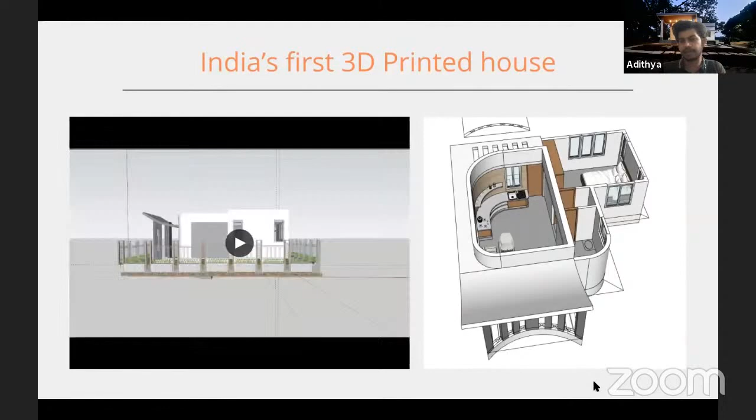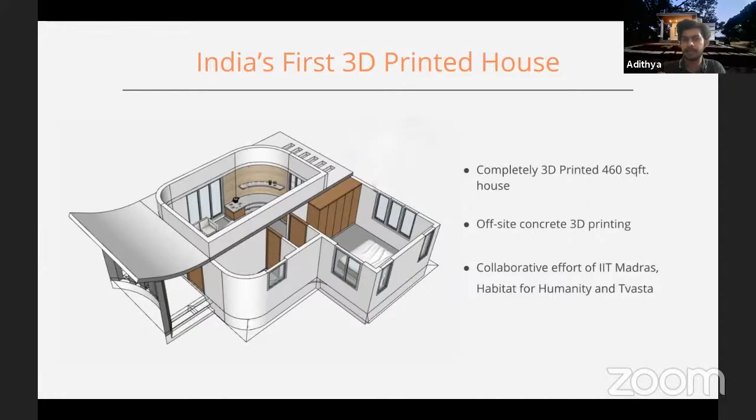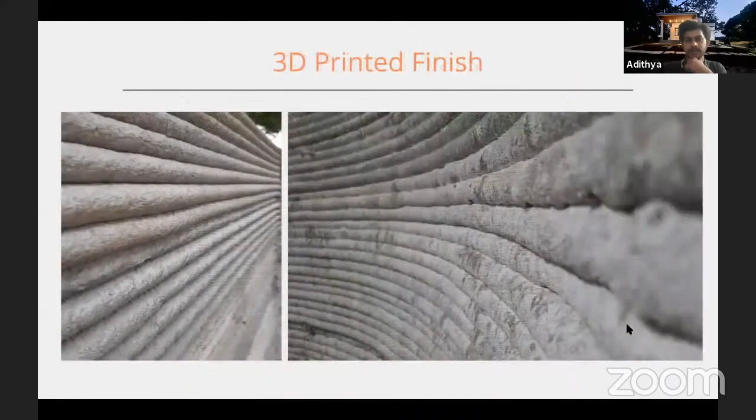So the real problem that we are solving within the Indian construction industry is catering to the existing demand. So there was a question about jobs. So what is happening within the current construction space in India is you have a real need to build about 100 million houses, or 10 crore houses, by 2030, but you do not have the technologies to really execute it. And the government has a really ambitious plan to build about 2 crore houses by 2022.

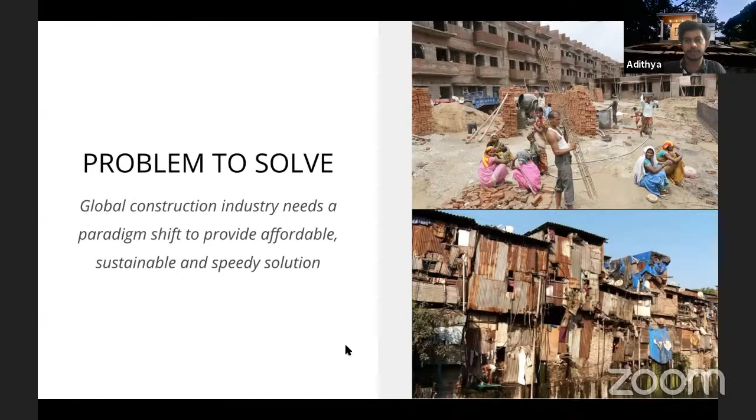And there is a real lack of ability to really execute these structures on the ground because of the lack of technology-led construction. And hence the government is pushing technologies like precast and 3D printing through building incubators and also giving projects early for these technologies to experiment with. The government is also establishing an accelerator in IIT Madras to sort of help us navigate the regulatory pitfalls, etc. earlier.

So this graph sort of explains why we need 3D printing or technologies like 3D printing within the construction industry. So while productivity has really gone up in every other industry, and especially in manufacturing, it has really sort of stagnated and even in some cases come down when adjusted for inflation over the past 50 years. So this is a graph of, I think, the US, but a similar case scenario exists in India.

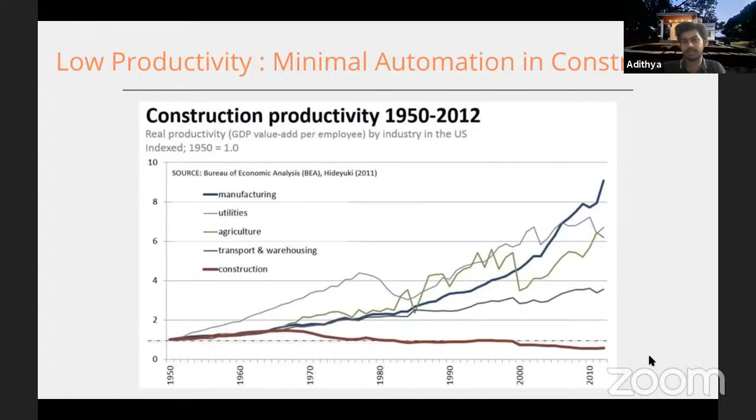So precast, which was actually introduced into India by Jawaharlal Nehru in 1947 to accommodate refugees coming from West Pakistan, is still spoken about as a new technology in the construction industry, whereas even in India it's 60 years old. And the Soviet Union used it for post-war reconstruction quite extensively in the 1940s. So the construction industry is very slow to adapt, and also I think it has been adapted only for large-scale construction, not for individual construction.

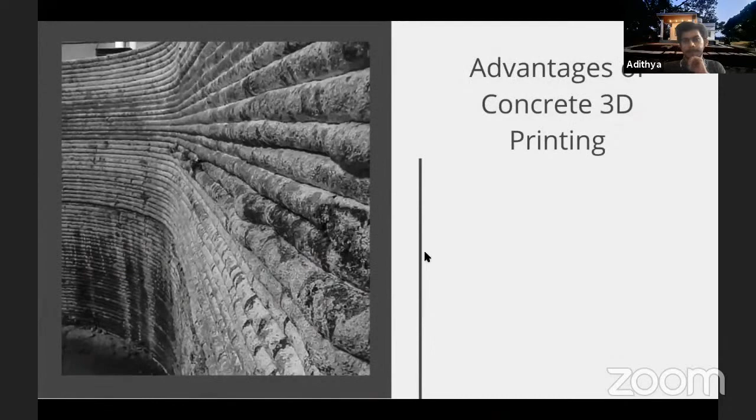That was a very interesting presentation, Aditya, and you had given us more insight into how this entire project came to be, because this is a long journey and it doesn't happen in 5 days as it is getting touted in the magazines and the news channels. There's a lot of hard work which your entire team has put in for years together.

Can I have a personal question? What is Tvasta? Why do you have the name Tvasta? Right. So this 5 days that we are speaking about. So what happened is this particular structure, we printed it in about 21 days because it was during the pandemic and we actually had a cyclone happening in the middle of that. Yeah, we had a cyclone in the middle of our construction process. So we can actually say that the house has withstood a cyclone even during construction.

But now if you're asked to print the same structure, for a 600 square feet structure, to print the elements, it would take us about 5 days. So that's what we are capable of right now. So what does Tvasta stand for? So Tvasta is a Sanskrit word. It means to create something out of nothing. So there is a good analogy that we can draw with 3D printing, to create something new through that. And this is fantastic.